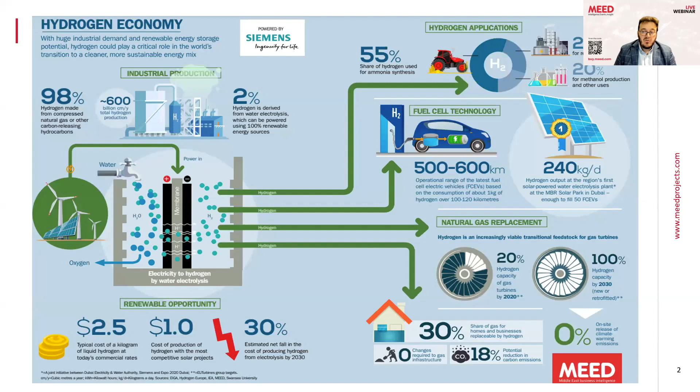Now, hydrogen in the Middle East and Africa is a fairly new phenomenon. It hasn't been around for many years. Indeed, I've been working at MEED for nearly 20 years, and it was only really 3 years ago that we started to have conversations around hydrogen. And you can see that illustrated here quite nicely. MEED.com produces thousands of articles, news, features, analysis every year. And until 2020, there were very few mentions of the word hydrogen.

In fact, MEED.com has been running since 1957, and the first time the phrase green hydrogen was written in MEED was in October 2019. And from that point, suddenly it was mentioned a lot more. You can see here that from 57 mentions of the word hydrogen in 2020, we jumped to 285 usages of the word in 2021 and 286 so far this year, with another month to go. So if this illustrates the level of interest or activity in hydrogen, then this really illustrates that.

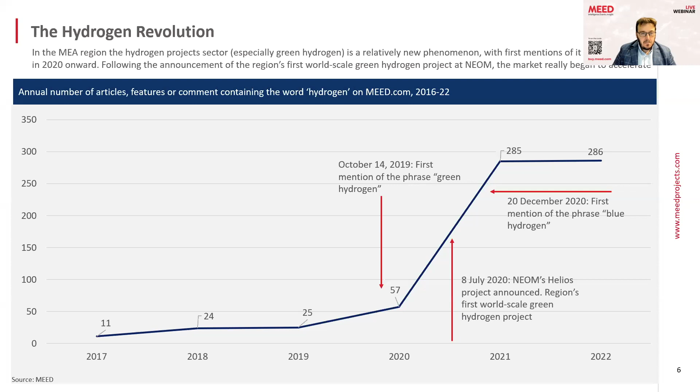And then in mid 2020, NEOM announced the Helios project with Air Products and ACWA Power. This is the region's first world-scale hydrogen project announcement. And at the end of 2020, we also heard for the first time the use of the word blue hydrogen in MEED. So it is something that has very much come out into the market very recently. It is something now everyone is talking about. We had more than 2,000 people register for this webinar, which again illustrates the levels of interest. So let's go on to the next slide.

So why is it that suddenly everyone is talking about hydrogen as opposed to 3, 4, 5 years ago when it was very rarely mentioned? Well, there's a combination of factors, and I've touched upon quite a few of them already. But one of the key drivers for the development of hydrogen production projects, and green hydrogen in particular, in the Middle East and Africa is the falling costs of producing renewable energy, particularly solar power. You can see here over time that there's been a dramatic fall in the cost per kilowatt hour of producing electricity from different renewable energy sources.

For example, onshore solar PV can now produce electricity at approximately $0.045 a kilowatt hour. That's dramatically down on the 2010 number, mainly due to better technologies, but also cheaper production costs of solar panels. And this is reflected here on the right-hand side by falling tariffs for IPPs. You can see that the levelized cost of electricity for various utility-scale projects has fallen over time, reaching a world record of 1.35 cents a kilowatt hour on the 2 gigawatt Al Dhafra solar PV in Abu Dhabi, which is one of the world's largest single-site solar projects.

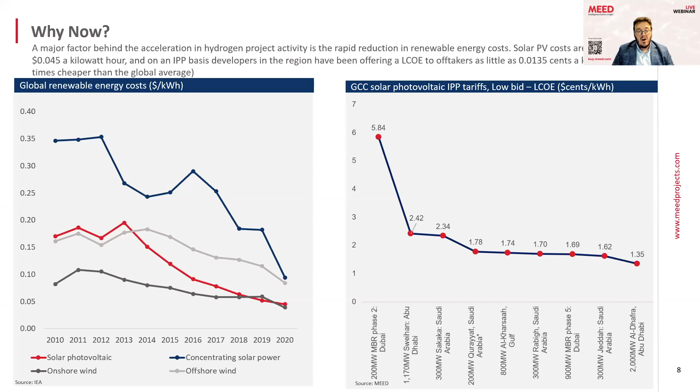So you can see over time, the cost has reduced, which makes the overall cost of electricity generation and hydrogen processing and the electrolysis process much more competitive compared with other fuel sources. So that's a very substantial reason why we've seen much more interest in hydrogen recently.

A second reason is that it's clear that demand for hydrogen is going to grow. The IEA estimates that in 2020, there was a global demand of about 90 million tons a year of hydrogen, and expects this to jump to 200 million tons a year by 2030, and then 500 million tons a year by 2050. So that's a very sharp increase as the world moves to net zero, tries to decarbonize, move away from oil and gas, and therefore with soaring potential demand, it's no wonder that people are looking to invest in the market.

So with this same increase in supply, we will move from about $5 a kilo on average for hydrogen production today to about $2 a kilo on average in 2030, and probably even cheaper in the Middle East, given the higher solar radiation levels and cheaper renewable energy production cost.

On the right-hand side, you can see some data explaining the current range of hydrogen prices and what it's forecast to become from various different sources by 2030 and then by 2050. And as you can see, it becomes more and more economic to produce green hydrogen over time, and will eventually also become cheaper than blue-gray hydrogen as well.

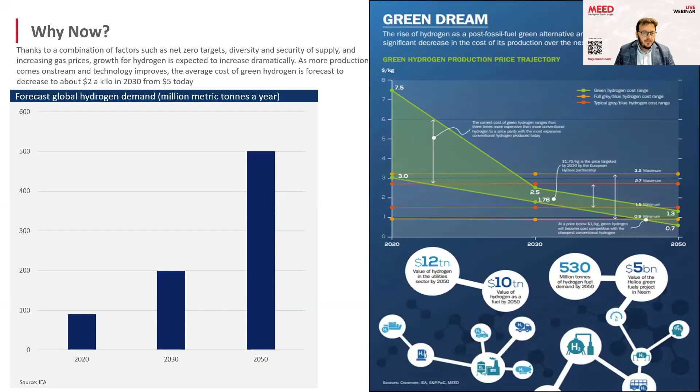So a very substantial surge in demand, and the IEA estimates that by 2050, the value of hydrogen as a fuel will be worth some $10 trillion. And of course, it's coming from a very low base today, but it's clear that there is a huge potential for the market. So those two reasons, along with a number of other drivers, are really what's accelerating this sudden surge in investment in hydrogen projects, particularly green hydrogen in the Middle East and Africa.

So just to sum up, clearly the region benefits from a number of significant advantages. It lies in a desert zone for a lot of the countries in Southern Africa and in the Middle East, which provides very high solar irradiation levels. There's also a lot of space to build large-scale PV projects and complexes. And because the Middle East sits in the middle of the main Asia to Europe trade routes and shipping routes, it's also in a fantastic location to export hydrogen or ammonia to other parts of the world.

Likewise, from a political and economic perspective, hydrogen offers one of the best solutions to substitute or replace oil and gas production. Over the next two decades or so, it's inevitable that demand for hydrocarbons will slow, and these are the main revenue generators for the countries of the region. Hydrogen offers them an opportunity to replace hydrocarbons as their main export, and so it makes plenty of economic and political sense to focus on hydrogen as well.

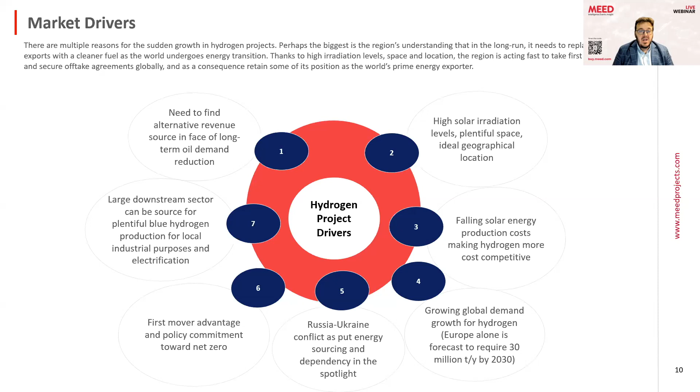So let's take a more granular look at the hydrogen market itself from a project's perspective. Now, one of the key technical decisions that needs to be made on each project is the type of electrolysis technology to be used. Of the 1,400 or so global known hydrogen projects, the majority use proton exchange membrane electrolysis technology, PEM. The second most common type of electrolysis technology applied is alkaline electrolysis. And then in terms of blue hydrogen, we also have natural gas with carbon capture and storage, normally underground.

And then solid oxide and biomass technologies can also be applied to electrolysis. However, given that the vast majority of hydrogen projects are still at the concept or announcement stage, decisions on their electrolysis technology have either not yet been taken or not yet disclosed. So we expect the same general trend to be followed in terms of the technologies currently applied, but this illustrates the different technologies that can be used. And there may well be some emerging ones that are applied in greater number going forward.

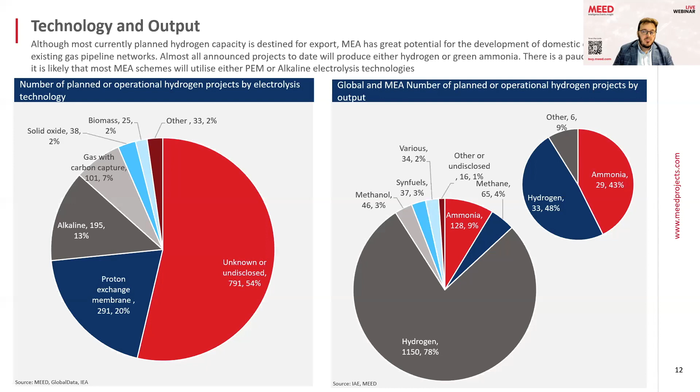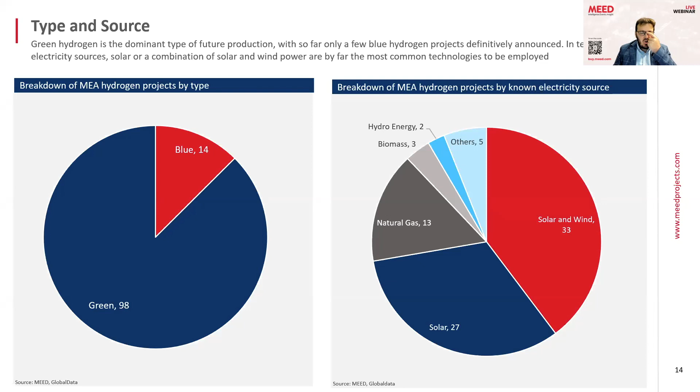And again, in terms of the breakdown of hydrogen projects in Middle East Africa by electricity source, as I mentioned, solar and wind projects combined, or just solar projects, are the vast majority of fuel sources for green hydrogen. We have natural gas, used primarily in industrial processes and downstream oil and gas facilities, being the source of 13 projects. Hydro energy, just 2, biomass, 3 projects. And as you can see, it's really all about using clean renewable energy in the Middle East and Africa for hydrogen production.

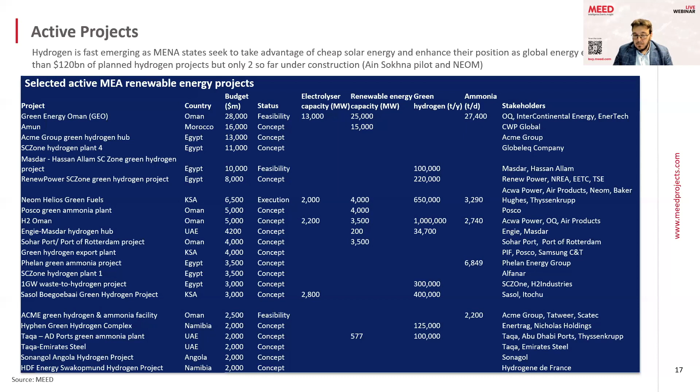So taking a look in a little bit more detail about some of the individual projects, I'll just go through half a dozen or so, as we haven't got time to obviously go through all 100 plus of them. But you can see here, this is one of the largest projects. This one is in Namibia. Namibia is touted as having one of the best hydrogen production potentials in the world, thanks to its huge amount of space and very, very high solar irradiation levels. This is one of the first projects. It's the Hyphen Hydrogen Energy Project on the coast in the Tsau/Khaeb National Park.

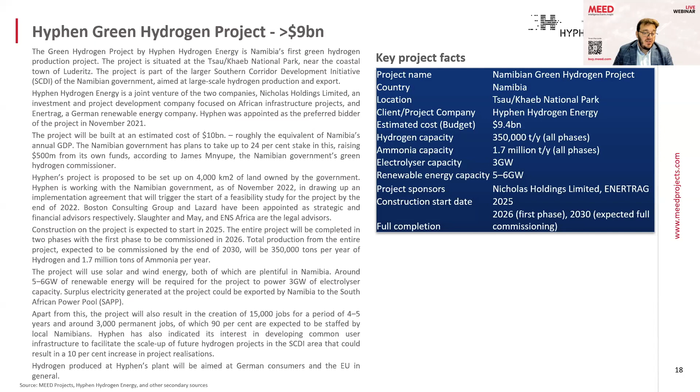It's a private sector development with a project company called Hyphen Hydrogen Energy, which is a JV between two private sector entities. It's worth just under $10 billion and will produce about 350,000 tons a year all told once it's fully up and running, and about 1.7 million tons a year of ammonia. This should, in its first phase, be completed by 2026 and its final phase around 2030. It will require between 5 and 6 gigawatts of solar and wind renewable energy. You can see here some of the key details. In terms of the resources, it's going to benefit from about 10 meters a second average wind speed and 2,600 to 2,800 full load hours a year of sunshine.

As you can see here, already quite a number of players are on board in terms of doing the strategic and financial advisory. Boston Consulting Group and Lazard, and Slaughter and May and ENS are helping on the legal advisory side.

This is the location of the project and just an overview of some of the different elements of it. It's covering an area of around 4,000 square kilometers. You can see it's comprised of quite a considerable number of wind farms and solar PV complexes, which will be surrounding an electrolysis site. And the central basic research done on hydrogen projects in Namibia estimates that green hydrogen in Namibia will be some of the most cost competitive in the world at just €1.50 to €2 a kilo, which is amongst the cheapest anywhere right now in the world.

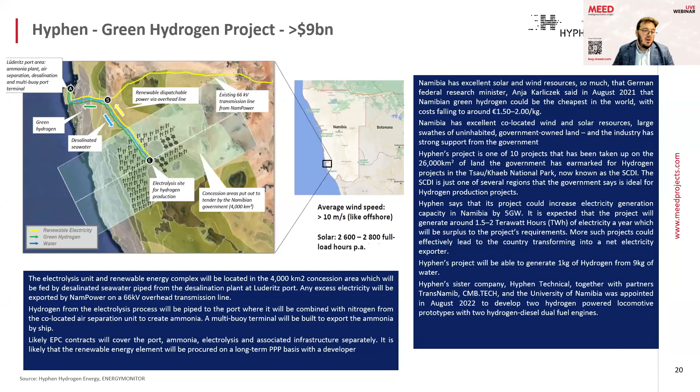So that's one exciting project which we expect to go to market once a final investment decision is made over the next 18 months or so, and is therefore going to represent a multi-billion-dollar opportunity there.

Now, closer to the Middle East, this is one of the world's largest green hydrogen projects, worth close to $30 billion, and that's the GEO, or Green Energy Oman project in Duqm in south central Oman. It's going to have a total solar and wind production capacity of a staggering 25 gigawatts, of which 14 gigawatts will be electrolyzing capacity. In turn, this will be able to produce about 1.8 million tons of green hydrogen, equivalent to about 10 million tons annually of ammonia. So certainly one of the world's largest green hydrogen projects.

The client on this is a combination of OQ, the Omani national energy company, Hong Kong-based Intercontinental Energy, and Enertech, which is a government-supported holding company from Kuwait. So very major stakeholders in the project. The land area, as you can see, is vast, but is in the desert, and Oman certainly has the space and the location to really benefit from large-scale hydrogen production. So a very significant project.

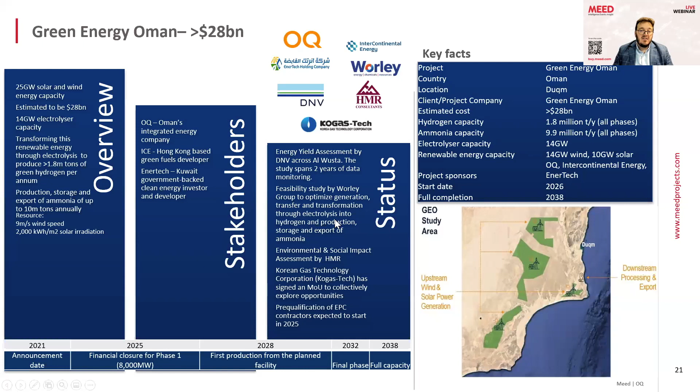Feasibility is already ongoing by Worley, and there's also the ESIA, environmental social impact assessment, being done by HMR. And already in terms of the demand and offtake, Korean Gas Technology Corporation has already signed an MOU to explore potential opportunities. So we expect pre-qualification for the different EPC packages on this to potentially start in 2024, 2025, with a view for first energy output from 2028, according to the client, and then ramped up in phases to full capacity by 2038. So very exciting project there.

Another really interesting project is a new green ammonia project in Kizad, the Khalifa Industrial Zone in Abu Dhabi. This one is by Helios Industry, not to be confused with the Helios project in Neom. But this is an approximately $1 billion green ammonia project, producing about 200,000 tons a year of ammonia from approximately 800 megawatts of solar PV capacity. So Deloitte has already signed up to advise on the transaction element of it. ThyssenKrupp of Germany is doing the technical study.

Key players or stakeholders in this are some very major engineering and power companies and power developers: KEPCO, Samsung C&T, Chemie-Tech, Petrolyn, and KOWEPO. So very substantial stakeholders behind it, which again gives good optimism that the project will be able to proceed. So we are expecting potentially construction to start around 2024 with the aim of completion around 2026, 2027. So again, very exciting project, Abu Dhabi being one of the world's cheapest places to produce solar energy, as we saw earlier in terms of tariffs.

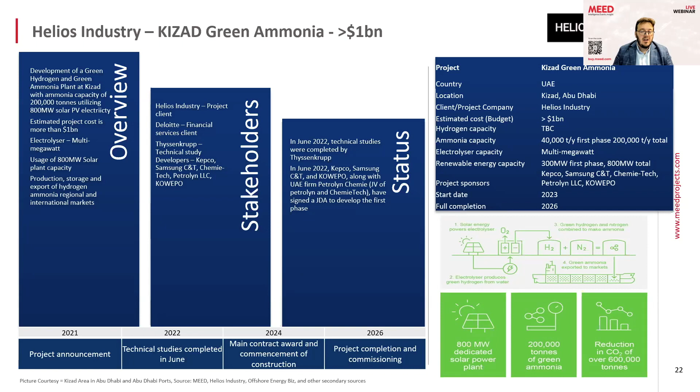Now, a very different type of project, one of the most innovative in the Middle East and Africa, is this fairly new project in Egypt, which is basically not using renewable energy, but using waste to generate power for a hydrogen plant. So this $3 billion project is called the H2 Waste Hydrogen Facility. Its client is H2 Industries, a German company, which is also going to be doing the EPC element, and it has a permit for land at the Suez Canal Zone from the Suez Economic Zone Authority to develop this particular project. It's going to have a hydrogen capacity of about 300,000 tons a year, which will be derived from approximately 4 million tons a year of organic waste and non-recyclable plastic.

So rather than using renewable energy, it's actually going to use waste. And of course, the carbon from that waste will be treated, captured, and stored. Now, unlike some of the other projects, or most of the projects we see in the Middle East and Africa, this is not going to be an export-orientated project. Instead the hydrogen output is going to be liquefied and distributed locally in trucks. So that is, again, another reason why it's quite different.

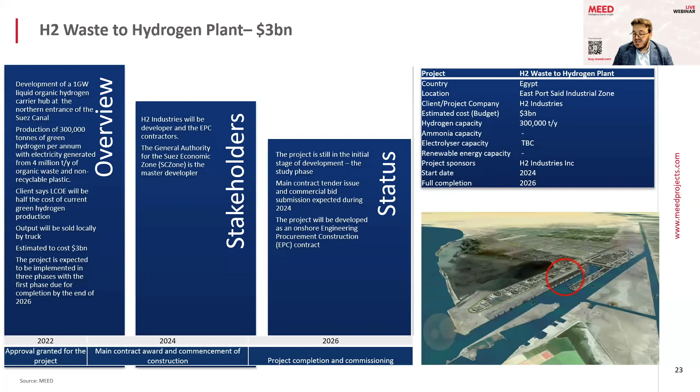We should start to see construction packages for this emerge around 2024, with the project potentially being completed by 2026, 2027. So a very different type of hydrogen project there. And then one more project to just illustrate today. This is also in KEZAD in Abu Dhabi. This is the Brooge Energy Hydrogen Project.

This is 300,000 tons a year of green ammonia in the first phase at a cost of about $1.5 billion, with the option or potential to upgrade further to 600,000 tons a year. It already has E&Y on board for consultancy services, and ThyssenKrupp Uhde is doing the technical study for the project. The preliminary land lease agreement has already been agreed on with KEZAD, and we expect, as I said, tenders for the EPC elements to come out over the next 18 months or so.

So there are more than 100 green hydrogen, blue hydrogen projects in the pipeline in the Middle East and Africa. Not all of them will happen, of course, but even if only half of them happen, there is still going to be easily more than $100 billion of contracts, or capex, needed to develop these projects, either in the form of renewable energy facilities, air separation units, electrolysis plants, hydrogen and ammonia production plants, and export facilities. So a very exciting opportunity, which we're only just at the beginning of.

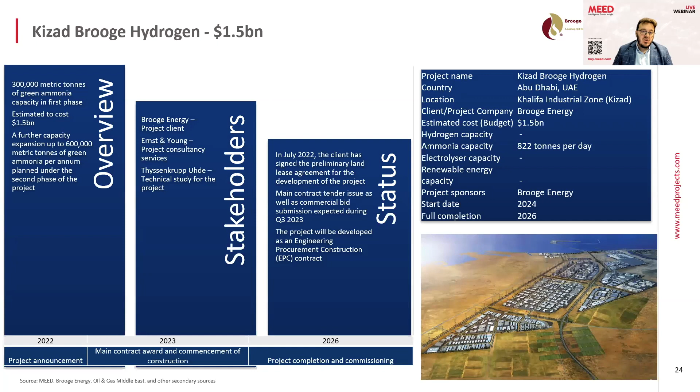So we've talked a lot about the potential. There are still, however, a number of challenges that need to be dealt with and overcome for the market to really grow. The first one is that we're still at a very early stage, and the market has yet to really prove itself. There are only 2 projects under construction and 1 completed, and the rest are still at the economic viability and feasibility stage, without final investment decisions yet being taken. But as I said, with so many projects announced and so many new ones coming to market all the time, we are really excited and expect that even if only half come, there'll still be a significant opportunity.

A key issue is the lack of offtake agreements and demand in general. Obviously, projects can't be fully financed until demand is secured and offtake agreements signed. And as yet, due to the higher cost of hydrogen and the hesitancy around the investment costs required for receiving infrastructure, de-liquefying the ammonia or hydrogen, there are still a lot of costs associated with that, and as it's still more expensive than gas-fired production, there's still some hesitancy around demand. But this will change, for reasons we've outlined earlier, and we fully expect that over the next few months and years we will see the signing of several long-term offtake agreements, which will ensure that these projects go ahead.

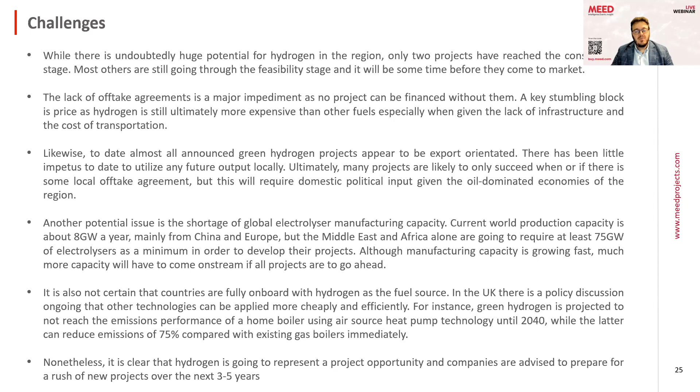And nonetheless, as I've stressed several times, hydrogen project activity is going to jump in the region. There's going to be easily more than $100 billion worth of project opportunities if you're a consultant, an EPC contractor, civils contractor, or just a supplier across that value chain, whether it's in renewable energy, electrolysis, marine export facilities, or general infrastructure. There is a magnificent and substantial opportunity in this new emerging sector coming up across different countries of the 2 regions. So there should be a lot of optimism for the market ahead.